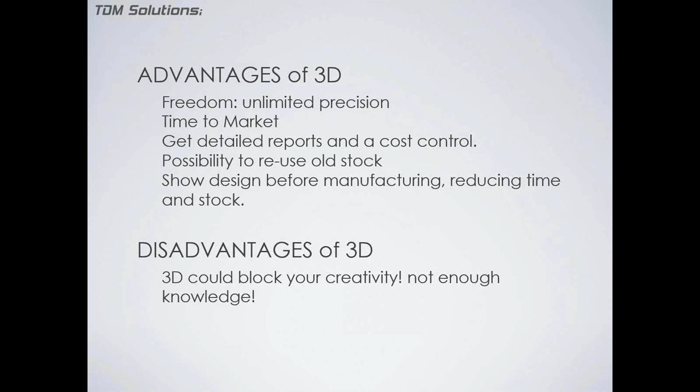For that reason, from the first day, we have a lot of training material on the website. We have videos, we have step-by-step tutorials, we have a lot of resources to help you learn the software. Well, a lot of things make RhinoGold different. Let me jump these slides, because we have a lot of things to talk about today.

Two interfaces in one solution. RhinoGold is a standalone product based on Rhino. When you install RhinoGold, it automatically installs Rhino inside and uses Rhino for all the modeling tools. And you can use RhinoGold in your interface inside Rhino or in the RhinoGold interface.

Today I will show you all the functionalities in the RhinoGold interface, but it's exactly the same in the Rhino interface. If you are a Rhino user and you love your Rhino interface, use it. It's exactly the same.

RhinoGold worldwide events. I think this is important to show you that we are worldwide. It's software developed here in Barcelona, but we are in the most important trade shows in the world: from JCK Las Vegas, New York, but also Brazil, Japan, Italy, Basel in Switzerland. I think this is important to know, that the health of the product is really good.

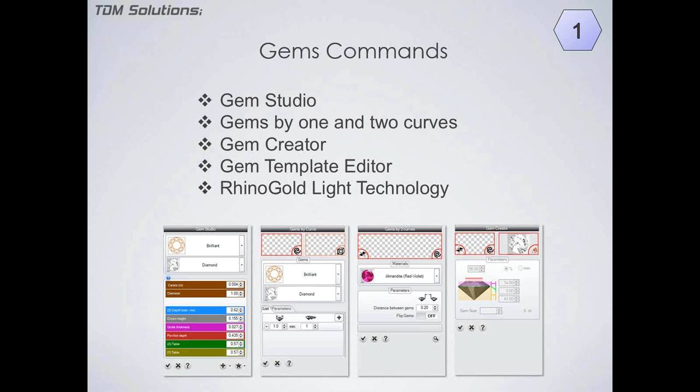The first commands are the gem commands. We have a lot of gem commands to place gems. Probably the most used is Gem Studio. Gem Studio allows us to add stones. We have other commands to do that, for example, if we want to place gems by one curve or by two curves. We have a lot of ways to place a stone. Let me show you.

Probably we have a small delay. Okay, for that reason I'm waiting some seconds.

Here we have the interface of RhinoGold. I repeat, it's exactly the same if you are running on Rhino. Here we have the gem tab, with all the gem tools. To add a gem is extremely easy, just we come to Gem Studio. Here on the right side we have all the commands of RhinoGold.

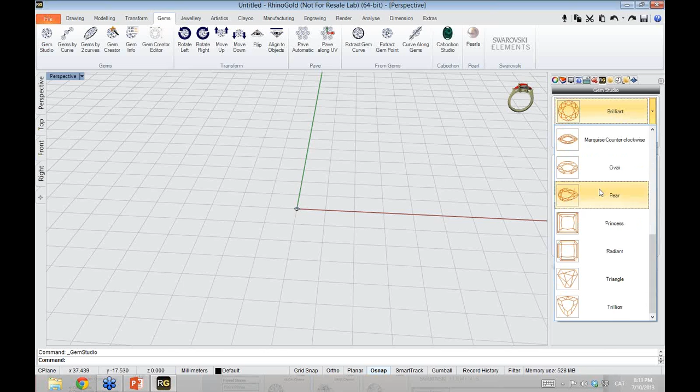In this case we are running Gem Studio, and here we have the option to select what kind of stone we want, the material, and all the sizes. In this case we are working with a brilliant, so we just have diameter. If we select other stones, we have other options. It's really easy, just type by diameter or by carats: 1 carat stone, 1 millimeter stone.

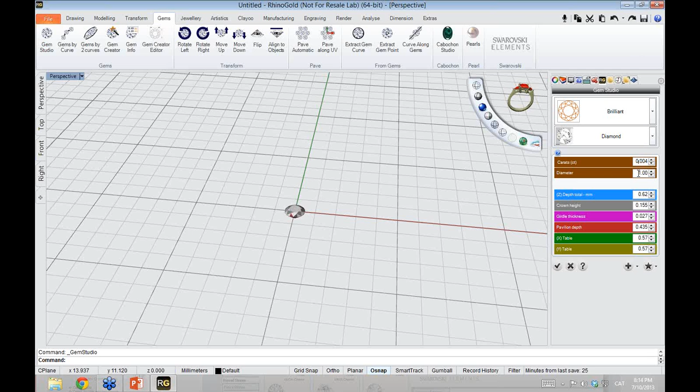Here we have the stone. It's extremely easy. One interesting thing is here we have a tree with all our jewelry objects. If I want to edit this object, I select it and press the middle button, and then this window appears, and we can click to edit the stone again. This is really nice.

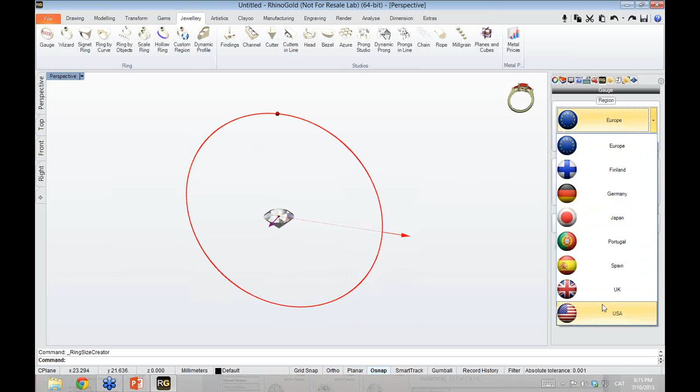Other important thing is if we create - let me hide the grid to work faster. In the Jewelry tab, I will create a circle with a finger size. Here we have the regions - US, we will select 5.5.

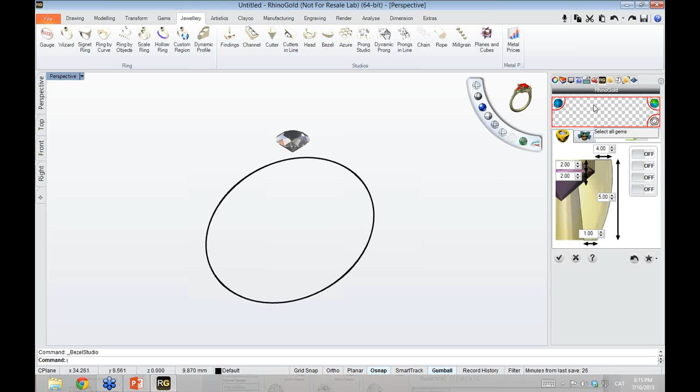Now with gumball we will move up, and now I will create a bezel. To do that is exactly the same workflow for most of the tools. We select the bezel command, and the first thing we have here is we must select a stone - here select gems and cabochons.

Automatically a preview appears. The idea is, in the RhinoGold commands, we can move the gumballs and modify our objects, or we can type exactly the values. For example, in this position I want to increase it. I can combine creativity and precision in the same command, and I think it's extremely easy to do. Let me add more points because this is a straight, and then I can move it a little bit.

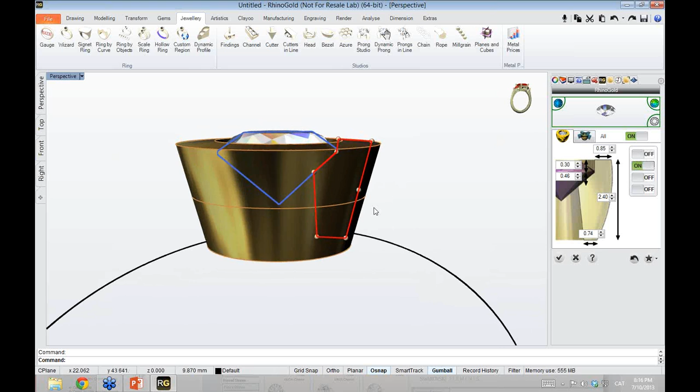And we have something better. The idea is, obviously, in our tree we have all the jewelry objects. If I don't want to see this tree, don't use it - just come to the gem, for example, and now middle button and edit.

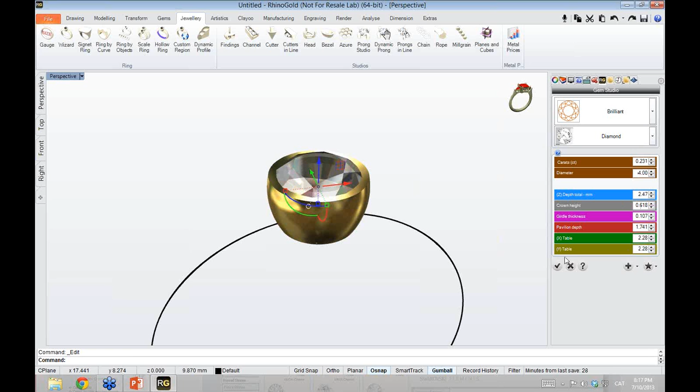I think it's not so complex.

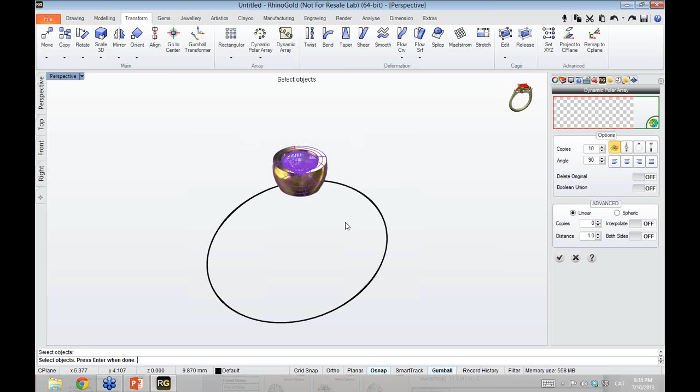Now in Transform, we have a command for dynamic polar array that we can select this object with. This is very similar to the polar array we have in Rhino, but here we have gumballs and it's a little bit more intuitive, because sometimes in jewelry we don't know exactly if we want 7 or 8 copies, and here we can decide at design time.

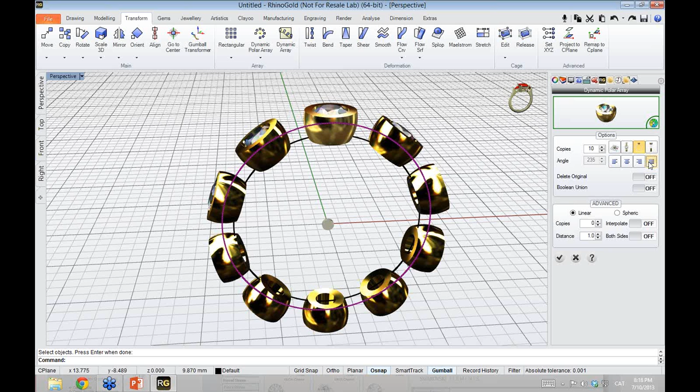Now I will add more copies, and also we have the option to add more copies in one direction. Let me show you - now we are adding more copies. And also we can interpolate, both sides. I think it's easy. And then we click OK, and we have our design.

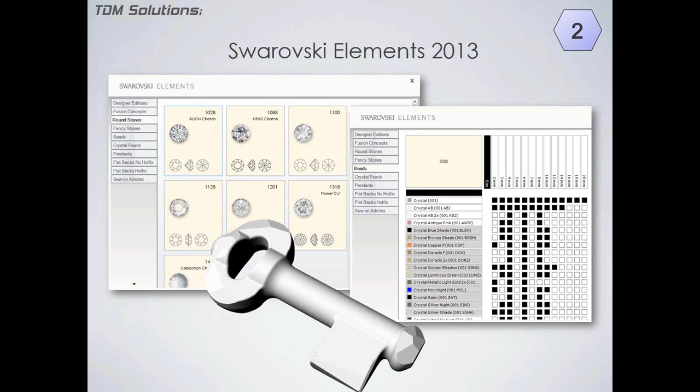The second top 10 feature is the newest Swarovski Elements catalog. We have all the Swarovski elements in 3D inside RhinoGold. This is really nice because you have all the objects, and RhinoGold recognizes these objects, to create reports and to create all that you want, with the full library here. I think this is really nice - you can find very beautiful stones.

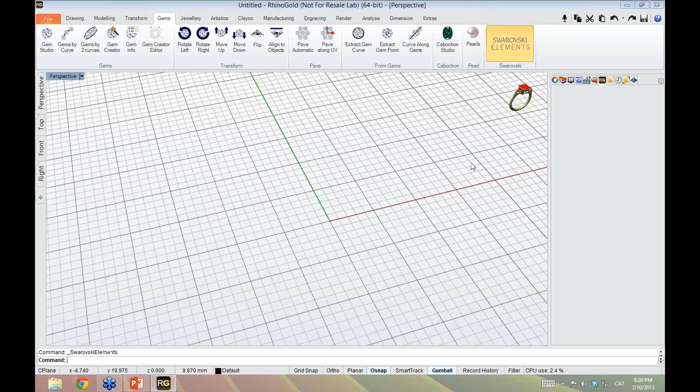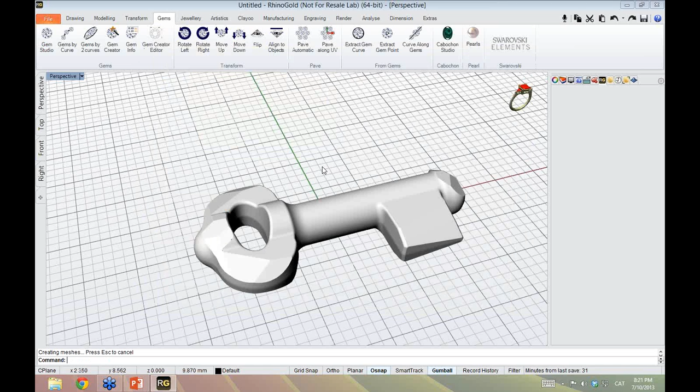Let me show you the Swarovski Elements - here we have this dialog, with all the families. Believe me, it's an extremely complete catalog - it's a lot of months of work to have this quality inside of RhinoGold. The idea is, all that you want, you have it here. If you want to add, for example, the key, just click on it, and here you have the sizes available in this model and also the materials. If you want to add the 30 millimeter crystal, just click here, and voila, here you have your Swarovski stone.

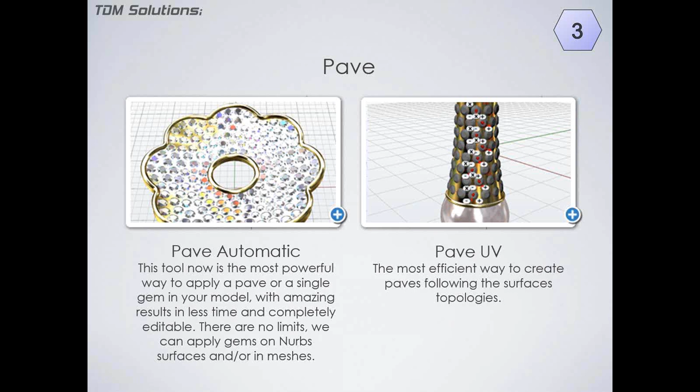Well, pavés. This is an amazing new tool in RhinoGold 4. I think it was a lot of work, months of work to create this command, and now you will see why I'm telling you that. The idea is to combine the automatic pavé with your experience creating pavés, because obviously the computer cannot create a beautiful pavé. It can create a mathematical pavé, but not a beautiful pavé. I think with this tool now you can interact with the software and say, okay, I want these stones here. Let me show you.

File open, and here we have pavé. Here we have this model. For sure this is an extremely simple model, the objective is that you understand how it works. On the website you can find a lot of videos using pavés, but here I want you to understand the concept and know how to work with this command. The idea is the pavé can work with any object that you have. It can be a surface, a solid, a mesh, or all of them. You can select different objects, different surfaces.

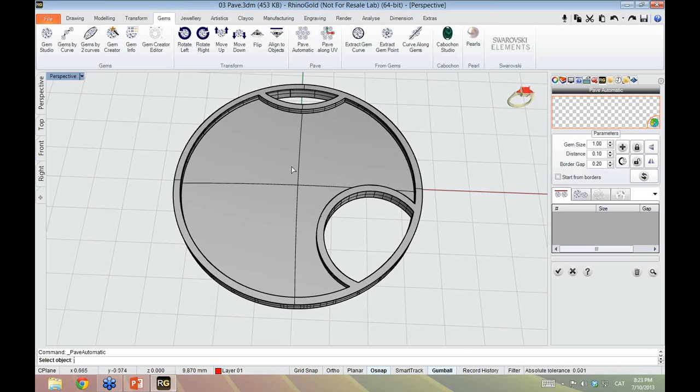Then obviously the pavé is inside of the gem tab. The idea is we come to gems and we have automatic pavé, exactly the same workflow as in Bezel and other RhinoGold commands. You click here and select where you want. In this case, just I want to use this. Great, here we have all the options.

By default, the pavé works with just one size. If you want to create a pavé with just one size, it's by default - just type here the gem size, the distance between the gems, and the border gap. But also you can define if you want a range. I want to use stones from 2 millimeters to 1.1, and then the pavé will try to fill first with the 2 millimeters, later 1.9, 1.8, and so on. But also we can select a gem list - imagine you want to create a pavé with just 2 millimeters, 1.6, and 1.4, then you can define that. In this case, just to show you the workflow, I will use one gem size.

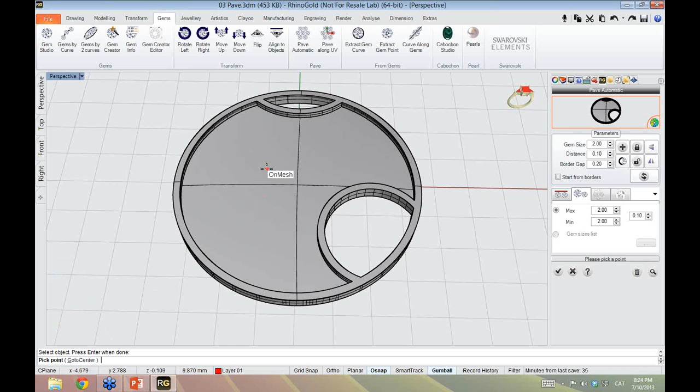The idea is here we have the preview. We click here, and in the command prompt we say, okay, pick a point or go to center. We can pick a point, the origin point for the pavé, or we can click go to center. As you can see, it's adding more stones and it's moving - this is to try to find the best position for all the stones. Then the idea is now we have all these stones, and it's done in an automatic way.

The idea is we can add more stones. For example, we want to add more stones, and now you will see here we have in red, because we have a collision. Then anytime I can click on refresh and try to adapt. Great.

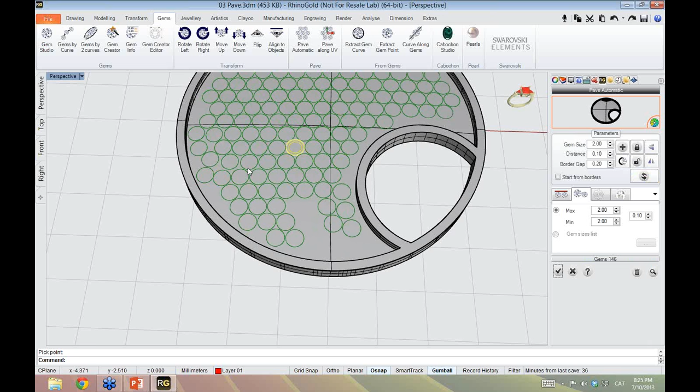Other options that we have: we can select different stones, and with the keys plus and minus, we can modify the diameter. In this case we will make it bigger, and obviously we can move it - any stone we can move it. And I repeat, anytime I can click here and it's recalculating.

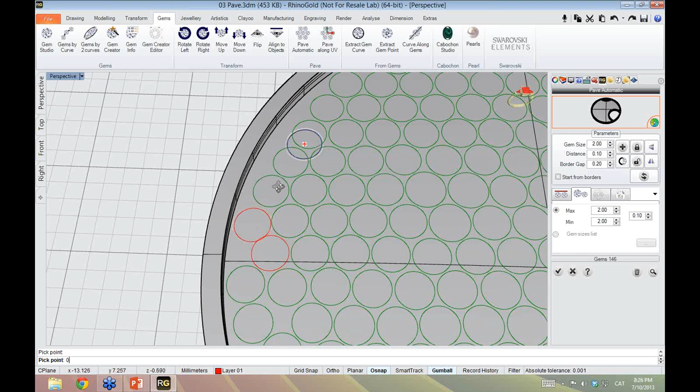Then now I want to add more stones, so I add one more here. Probably here we don't have space, but anyway, I wanted the pavé to try to place it. Then I can move it here.

Other important thing is I can say, okay, I don't want you to move these stones. For example, I place these stones here, and I don't want to move them, so I can click to lock objects. Then the pavé will move all the rest of the stones, but never will move these stones. If you like one area, you can lock it, and that's it.

For example, now here is bigger, we can resize - here too - and recalculate. We can select by window if we want, and also we can delete it. If we don't like one stone, we can click here, press the delete key, and delete it. I don't want this one.

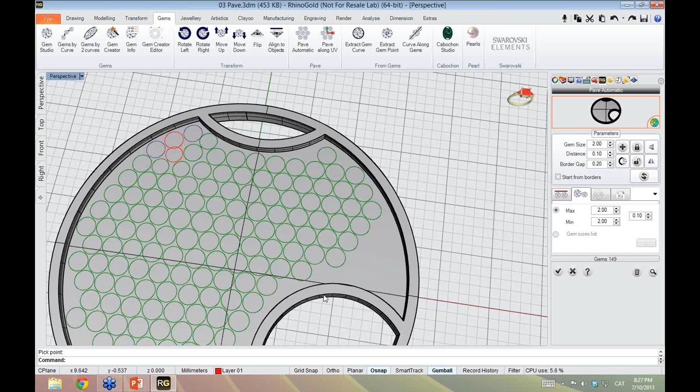I think it's easy. Other important thing is the refresh button and the preview. The difference is the refresh doesn't add any stone, while the preview always tries to add more stones. So if we click here, it will try to add more stones.

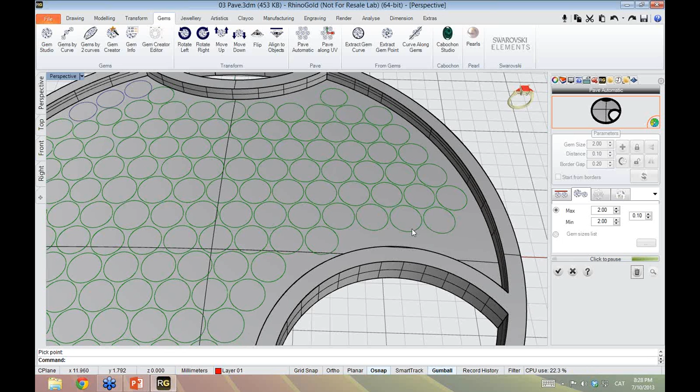Okay, then probably the last thing in pavés is we can add automatically the prongs. This is completely automatic, and of course we can move it. As you can see in blue, it means it's selected.

Also, you can select some of them and increase the size exactly as we use it in the stones, and we can add more and more. I think it's really easy to use. But the best thing probably is you can drag and you can delete and add more stones and so on.

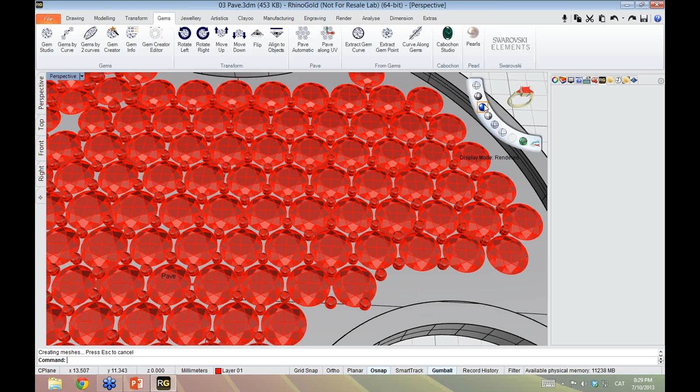Then when you finish the pavé, you click here and you have your pavé done. Obviously the pavé is on the tree. It means later I want to edit this pavé, we can edit parametrically and add more stones or modify some parts. I can do what I want, because it's parametrical.

Next one, here we have another command, Pavé along UV, which allows creating pavés following the UV topology of the surface, but we have no time. We must talk about a lot of things.

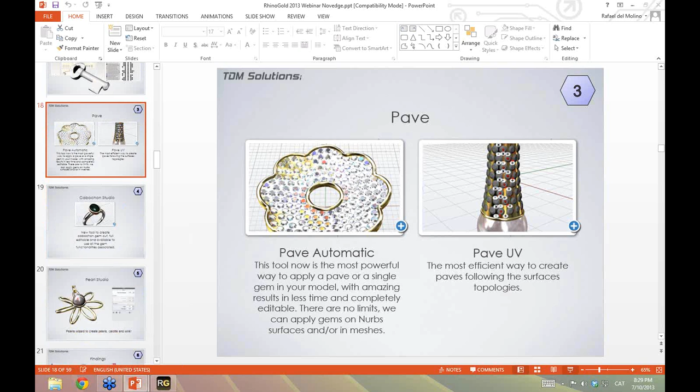We have Cabochon Studio. It's a tool to create cabochons, extremely easy to use. Let me show you. Have here cabochon, and the idea is the same. We click on Cabochon Studio, and here we have a preview.

We have the different types of cabochons, and here we can modify the sizes. We can increase. Great, here our cabochon, and also in our tree.

Next one, the pearls. A lot of RhinoGold 3.0 users ask about pearls. Here we have the command Pearl Studio, which allows creating the pearl, the calotte, the wire, all that we need. Also we add the finding. We will see in our Clayoo exercise that we will add some findings, but here we have a really nice, good quality library of findings, and later you will see how easy it is to add it.

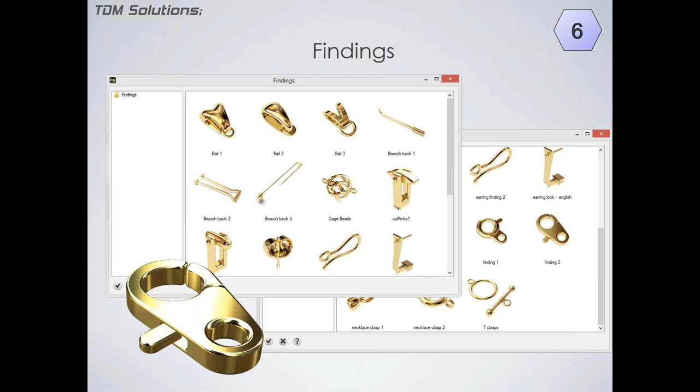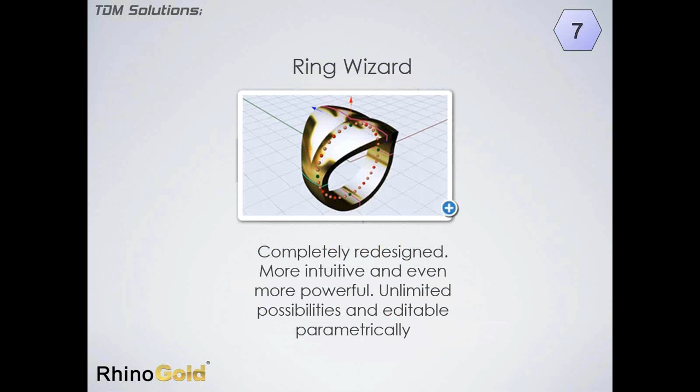Next one, Ring Wizard. Probably this is one of the easiest tools to use in RhinoGold, to create very simple rings. Let me show you.

Here in the Jewelry tab we have all the metals commands, the ring, the signet ring, the head, the bezel. Then to create a ring, one way is to click on Ring Wizard. Let me change to render it. The idea is, by default, we are working with this profile. We can modify all these values using the gimbal or typing here all these values.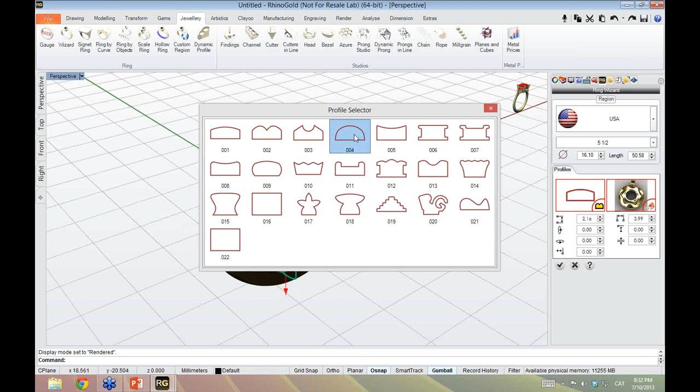Also, we can click on profile and change the profile. Now I will click on the top and I can move it, and now it's affecting just this area. If you click outside, it automatically disables the selection. If you click here and later you click here, you have both, then any modification that you do now is affecting both.

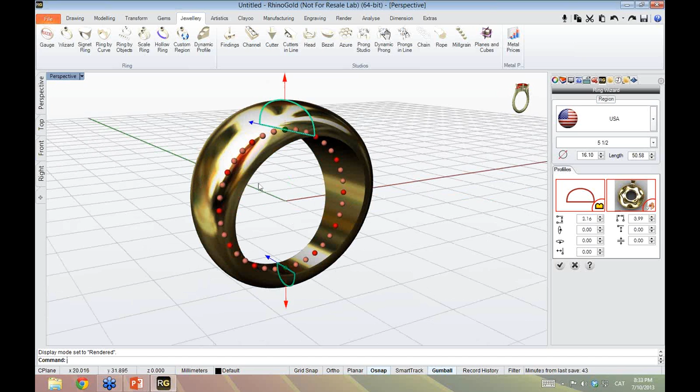Now I want to change the profile and use this profile. Now it's affecting both. If you click again, it automatically disables. Other options we have here: we can hollow the ring. As you can see the section, we have 0.6, and obviously we can add all the profiles that we want.

And our ring, anytime we select the ring, we can edit this ring. I think this is really interesting.

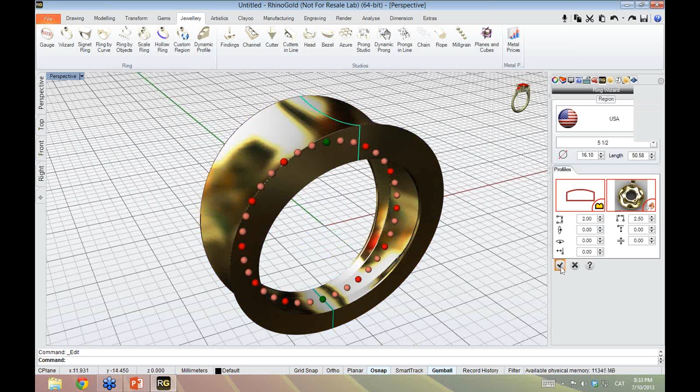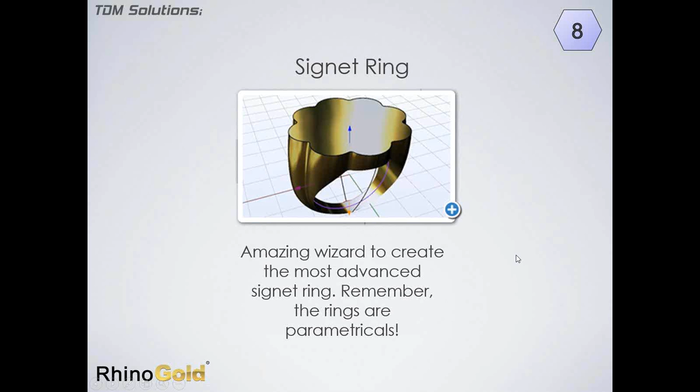Next one, signet ring. This is a tool to create signet rings. Let me show you. The concept is really similar. The idea is we click on signet ring on the top, and RhinoGold shows us just a preview.

And the idea is we can modify the shape. Here we have a library of shapes. Of course, you can add your own shapes just by clicking here. Then, if you want to use one RhinoGold default profile, you can, but I recommend you add your own.

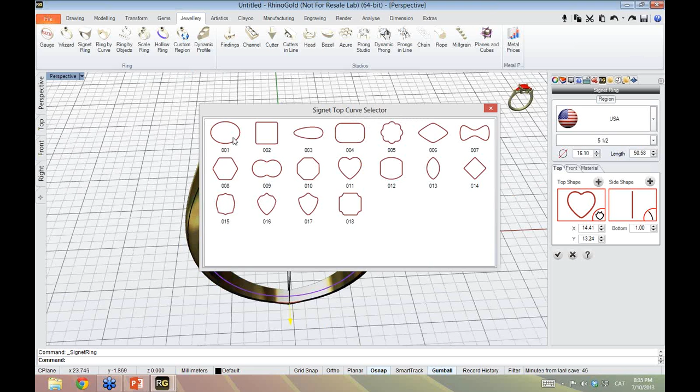Great, then also we can modify this section. By default it's straight, but we can change the side shape and define this one. As you can see now, the profile is completely different, and then we can modify.

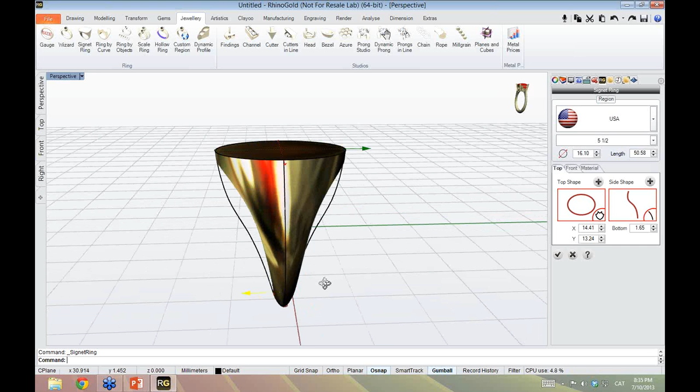If we change to 'Front', we can modify all these options, if you want to add more. As you can see in the gumball, you see the distance, but anytime you can type it.

Here, our signet rings. Forget trying to do it with network surface and all these things. Later, I want to change the size, F2 key, and now I will change the size, keeping exactly the same shapes. Easy, right?

A scale ring. This is a really nice tool. The idea is, imagine in this case we want to scale this ring, but we want to keep all the stones area. I want to scale all the ring, but I want to keep this area because I want to use the same gem sizes and so on. Then I can define that I want to do a scale keeping this area. It's really easy. And also I can export automatically by layers. For example, I want you to create one layer per each size, or you can export to STL. Okay.

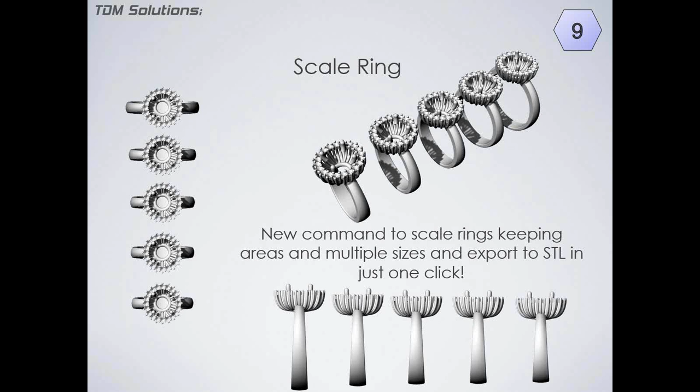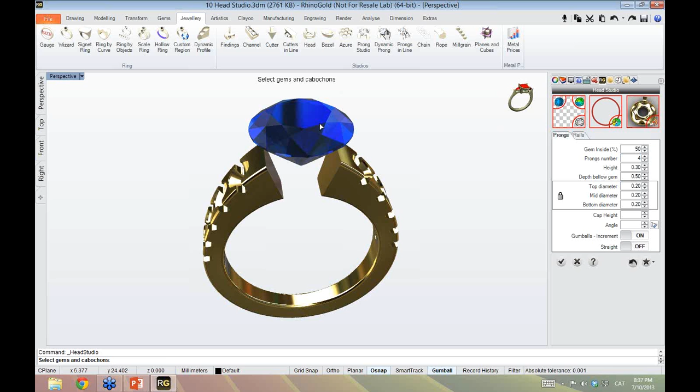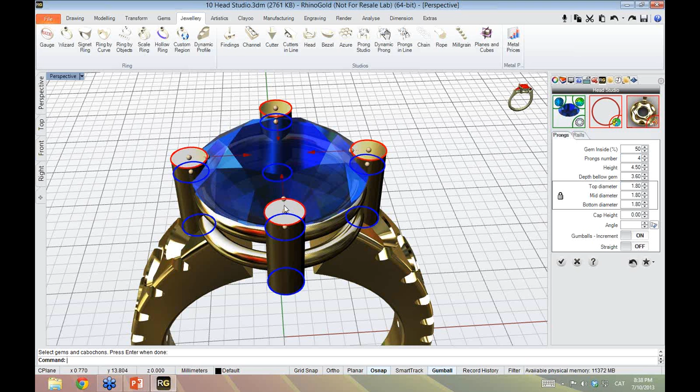Let me show you some tricks. If I click on a profile, it's just affecting this profile and this prong. If I want to modify all of them, if I press the shift key and then I click, it automatically selects all of them. So when you want to modify all of them, use shift. For example, I want to move this prong, but with shift, I'm moving all of them. Okay.

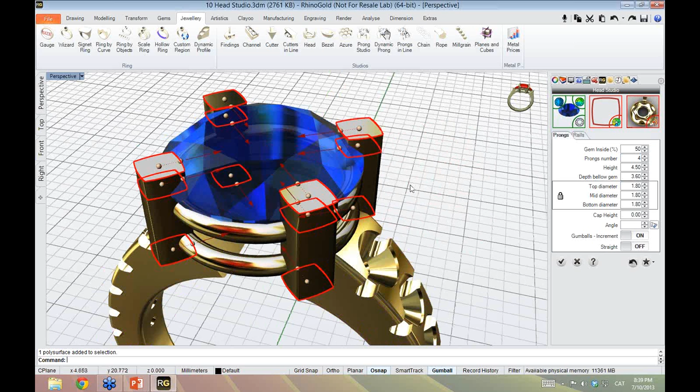Then, for example, I want to modify the profile. I can modify just the top, but in this case, I want to modify all of them. Then I come here and I select a profile. For example, I want to use this profile. Easy, right? Now I want to unselect all, so I double click outside. And now I will select the bottom part and I will move it. Not so complex, I think.

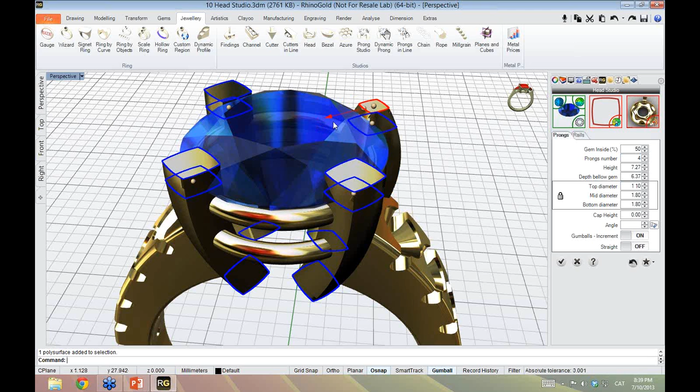Obviously, you can modify all that you want, the sizes and so on. You have the undo. And also you can modify the rails. Imagine that I want to select this rail, and I want to move it down. I want to select this rail, and I want to move it down, and I want to scale it. Okay.

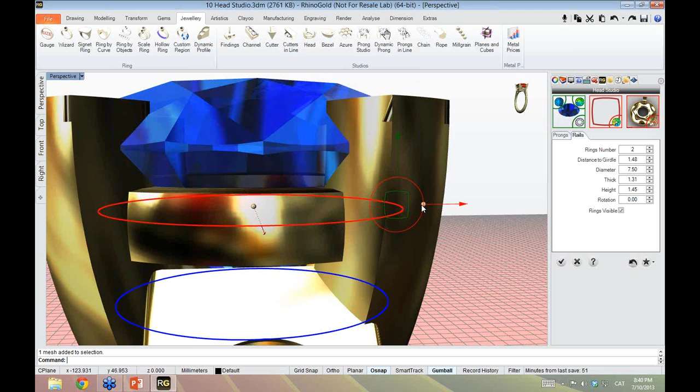Obviously, if I select both and I come here, I can select any shape. Let me move and scale a little bit in this direction and move it a little bit. And also, if we want, we can rotate it. We have the option to rotate this profile as we want. Now the same on the bottom. We will come to this sphere, and in this sphere we can scale, rotate, and move it down.

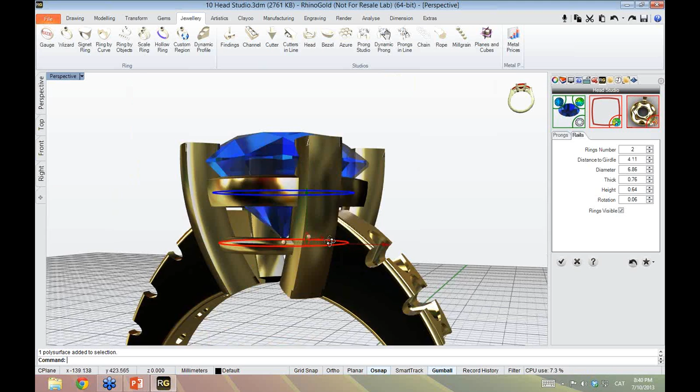Then I click to accept, and now we have this head. And this head knows that it depends on the stone. If we modify the stone, it automatically adapts the head. Really easy. And of course, select the head, F2, and then you can edit again and do what you want, add more and so on.

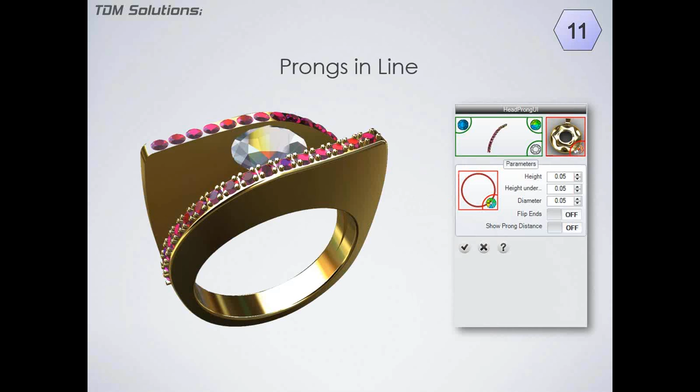Next one. Well, we are in the top 10 features, but we have 10 minutes. Let me present you again the top 10 features part 2. It will be really quick. We have tools to create prongs. One of the objectives of RhinoGold is to try to save you time. Let me show you this tool, because it's probably one of the most representative tools about saving time.

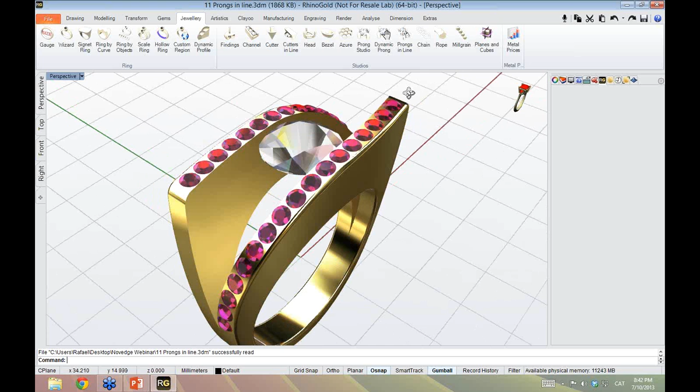Here, prongs in line. I want to add prongs here. We have different options. We have the Prong Studio, but in this case where we have a line of stones, we have prongs in line. Then the same concept. First, select the stones. And here is the result, we have a prong, and take a look at that. Probably in shaded it's better.

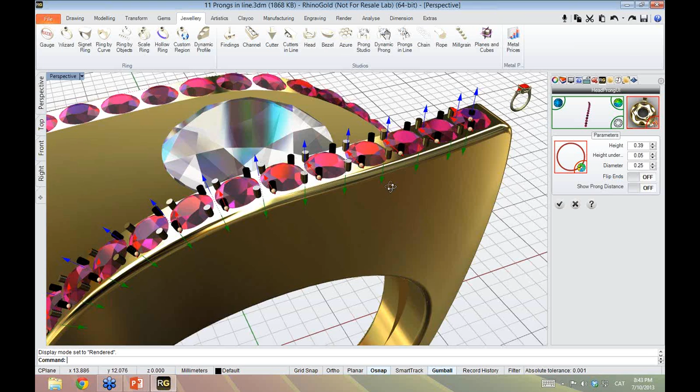If we move outside, it automatically adds a new prong. Easy, right? But if you move it on the stone, it automatically adds 4 prongs. Then if you want to affect all of them, if you press shift, it affects all the prongs that we have. We can modify one height, but with shift it can affect all of them. We can modify diameters. Let me define 0.6. And also in this part, we can align.

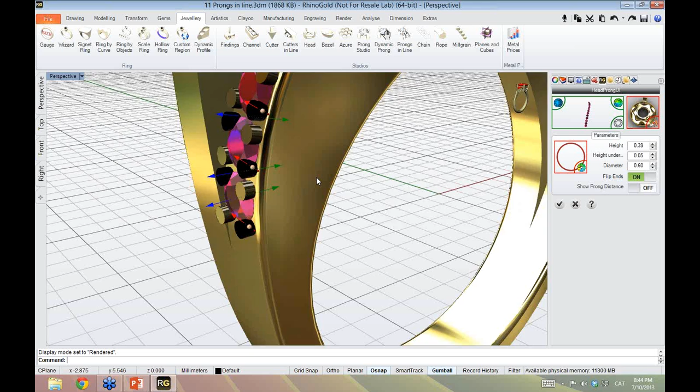Okay. Then here we have our prongs. Let me explain one thing: now the prongs are a cylinder, just a cylinder. And we don't want to add more options in this command, because if not, we have 25 options in each command, and I don't like that.

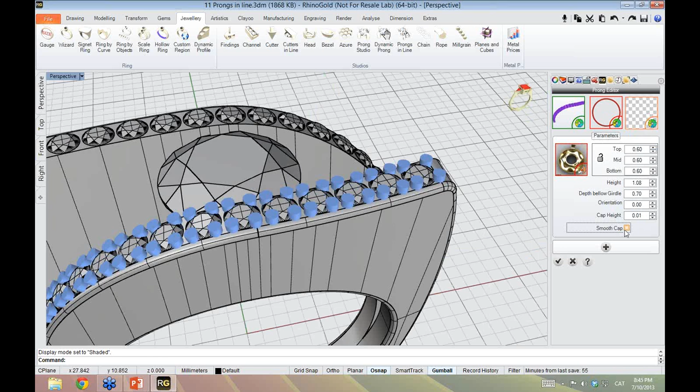Oops. Sorry for that. This is my computer, my working computer, and I'm not working with the official RhinoGold version. Okay.

We have the report tool. This is a really interesting tool to analyze all the cost and so on. Obviously, we have tools in RhinoGold if you want to analyze the weight of one object. You can. But probably the most interesting thing is you do one click and it automatically analyzes all your model. Let me show you.

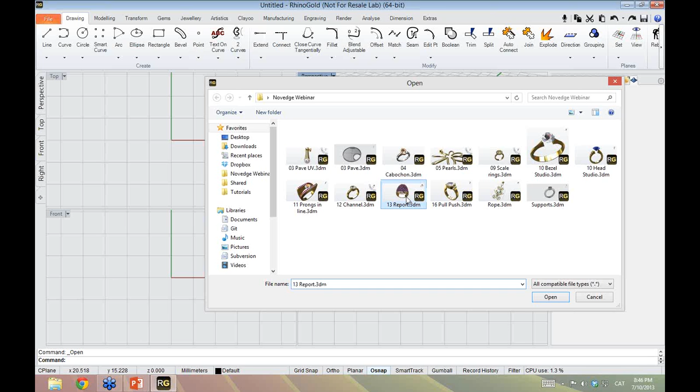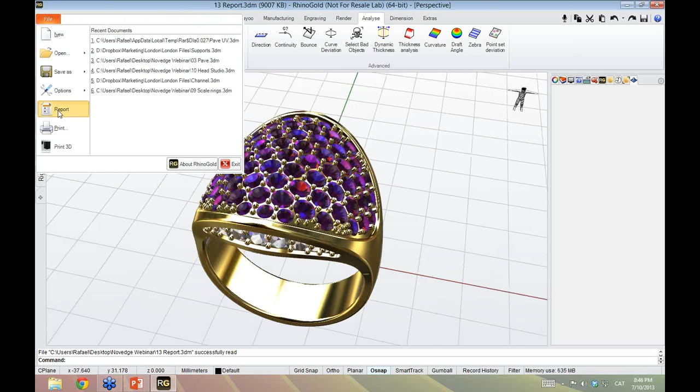Here we have our design, and here in Analyze, I can analyze the weight of the metals and so on. But probably the most efficient way to do that is to come to File, and here we have Report. Now RhinoGold is analyzing your design and counting everything. And here we have an overview.

When you save your file the first time, it automatically starts recording. Then you can know how much time you invest to model one design. Here we have different tabs with all the quantities, all the metals, with a small preview. We have the calendar, and here in tasks we can define.

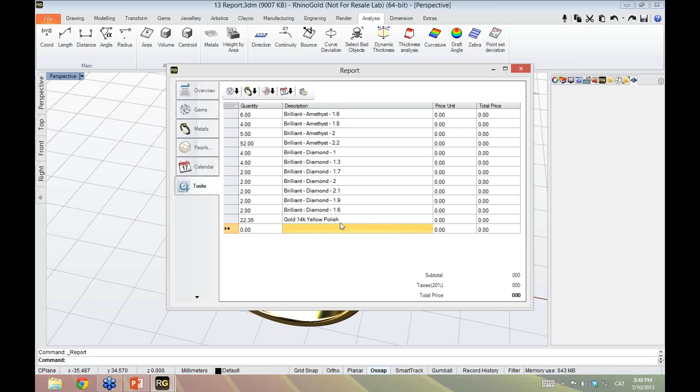We can add all the stones with the metal, define other tasks, and type here, and here you have an easy tool to create a pro forma invoice, or just a report. Good.

RhinoGold has real-time rendering materials, and this is really important because the materials are render materials but also have physical properties. When you change the stone material or a metal material, RhinoGold automatically knows the material is different, and obviously the weight is different. For that reason, when you have different kinds of metals, you don't need to check one by one. Just apply the materials, and the report will calculate for you.

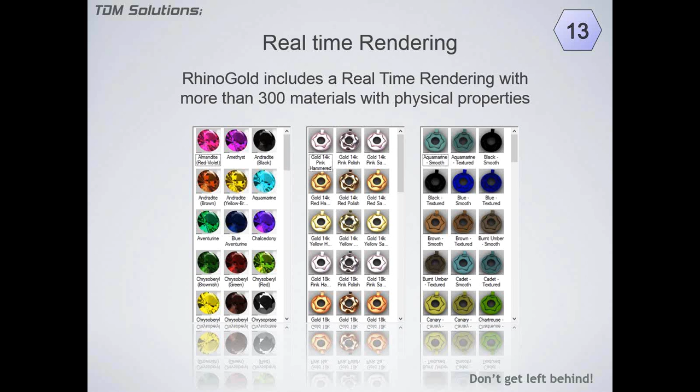Well, raster to vector is a tool with which we can convert any image or sketch to curves. Also, we have Texture 3D. This is an amazing tool to create 3D textures on your jewels. And the best thing, this is a surface. Then you can prototype, you can trim, you can do all that you want.

Another interesting command is Pull Push. It's a command where we can select a curve and an object and automatically push and pull inside of the solid.

Also for manufacturing, we have a lot of tools for 3D printing. We have nesting to calculate the position of all the objects, and also tools to generate all the supports. Some printers need supports to print, and here we have tools to create that extremely easily. We have nesting to place all your models in your machine, and STL Wizard to automatically repair your STL files.

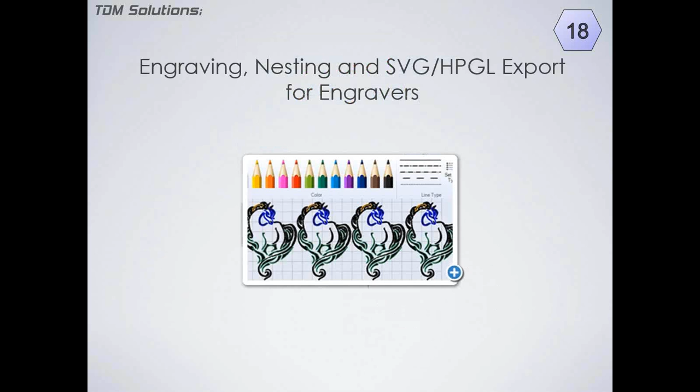By default, you have about 20 printers from SolidScape, DWS, EnvisionTEC, and so on, but you can add your own printer there. Also for lasers and cutters, we have tools for engraving, for nesting, and also for exporting in engraving formats.

Well, we have very few minutes. Clayoo, what's Clayoo? Clayoo is a tool to model in a freeform way. The idea is when we want to create organic shapes, Clayoo offers us a lot of advantages to model. Let me show you a sample, a couple of minutes, to understand how it works.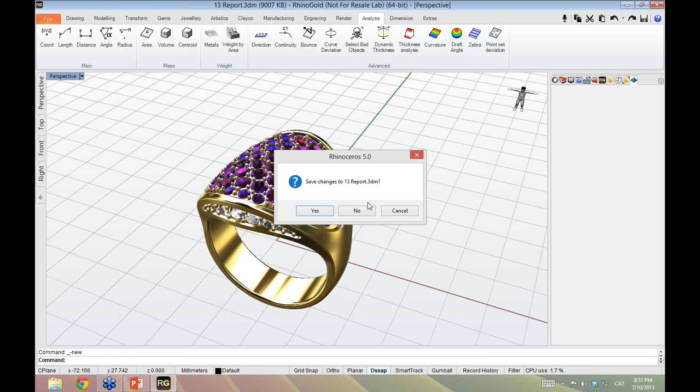Imagine that I want to model this plane. This is a pendant, and I want to use this picture to create this object. Obviously, I can do that by creating curves, loft, and so on, but I want to show you another way. The idea is, here in Artistics, I use the command Place Image 1:1 to place our design. Okay, we'll make it a little bit bigger.

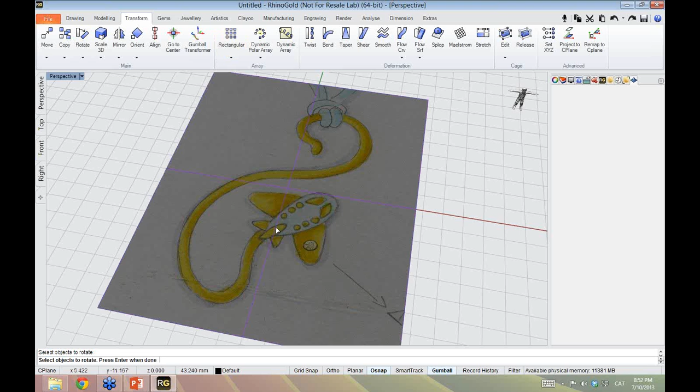Okay, probably a little bit more. Okay, I want to model this part. First of all, I will rotate it because it will be more comfortable to work. Then I will select and I will rotate it. And then I select, and here I have to lock.

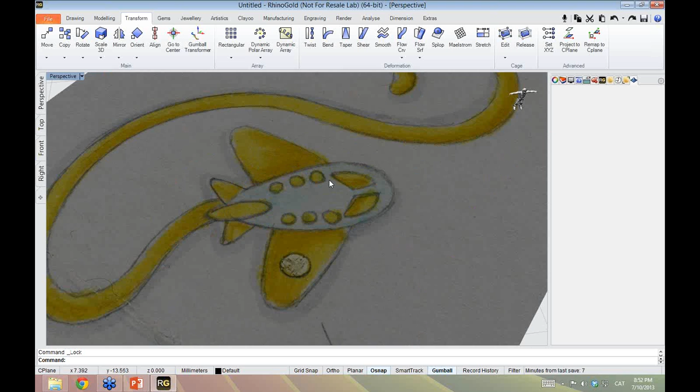Okay, in RhinoGold you have all the viewports, all the display modes here, but if you press Shift, you have hide and show options and also lock. Okay, and now I will lock it to work more comfortably. Then here we have the tab of Clayoo.

Then I will start, just to explain the concept, modeling from an ellipsoid. And the idea is I can select the objects by faces, by edges, or by points. Then the concept basically is I can select some faces and I can scale it, I can rotate it, and I can move it.

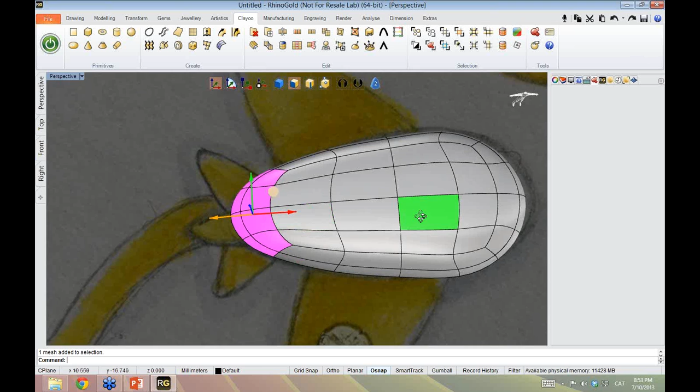Okay, for example, right now I will select, and I will scale that. I change to move, and I move it a little bit. Then the idea is we are selecting different faces, and then we can move it.

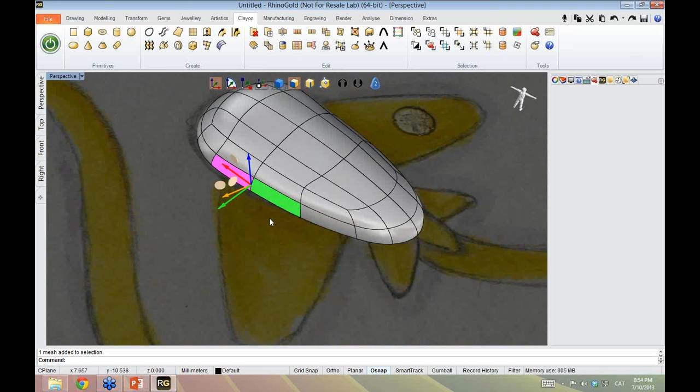Now I want to create the wings, and I will select these two faces. And I will use a command called extrude. The idea is we can select this face and this face, click to extrude, and then extrude these faces in this direction.

I don't know what's happening with my computer today. Let me show you.

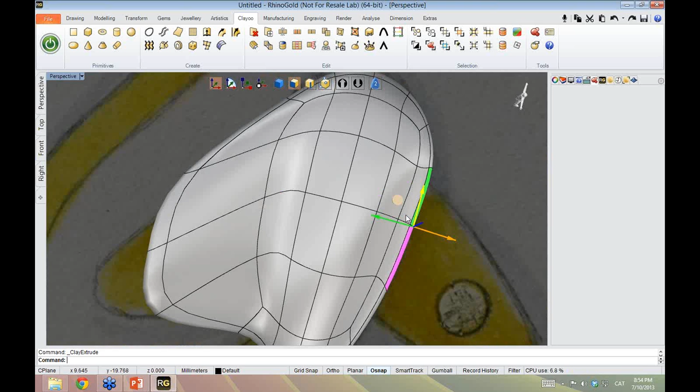Okay, and the idea is I can move all the faces and add more faces and so on. Then I select this one, I extrude it, and I can move, select some points, and adapt to any shape.

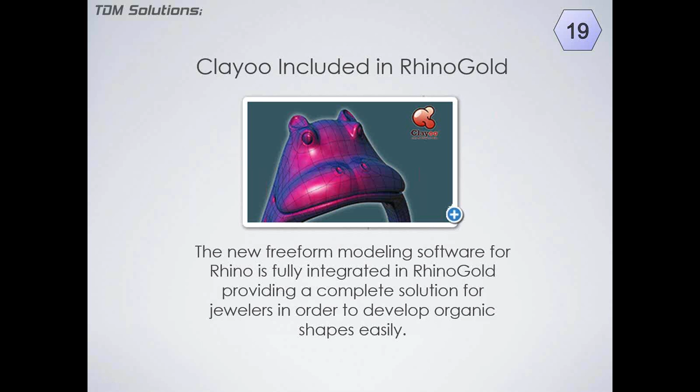For sure we have a lot of tools that would need a couple of webinars just to explain, but this shows the concept that we can pull and push and create organic shapes with Clayoo. RhinoGold includes Clayoo. All RhinoGold licenses include Clayoo. If you have RhinoGold 4, by default you have Clayoo.

Then, RhinoEmboss is still in development, but it's working really fine. RhinoEmboss is to create reliefs. The concept is we are creating curves and we can create reliefs, and it works really nice. I hope in a couple of weeks we can release the first public beta, because right now we are working on the tutorials and all this stuff.

But it also will be included in RhinoGold. If you have RhinoGold today, after we release RhinoEmboss, you will have your own license too. And exactly the same with the Swarovski Elements and so on.

Well, of course, in 40 minutes I cannot explain more things, but we skipped a lot of commands: smart curves, text on curve, scale by wave, chain studio, texture creator. There are a lot. You can find videos and so on on our website too.

Last few minutes, RhinoGold Render Studio. The idea is RhinoGold Render Studio allows us to create renders in minutes. You just select the environment, the ground plane and the materials, click render, and that's it.

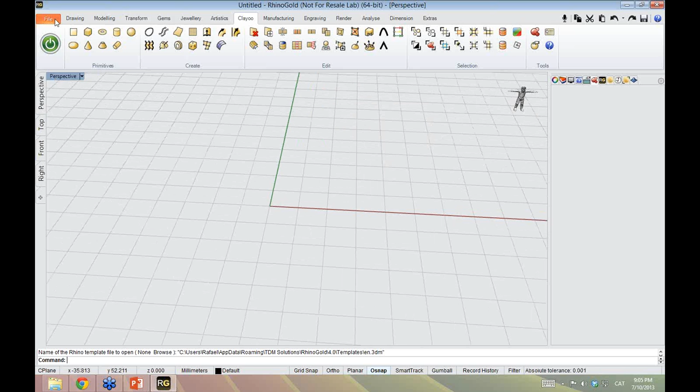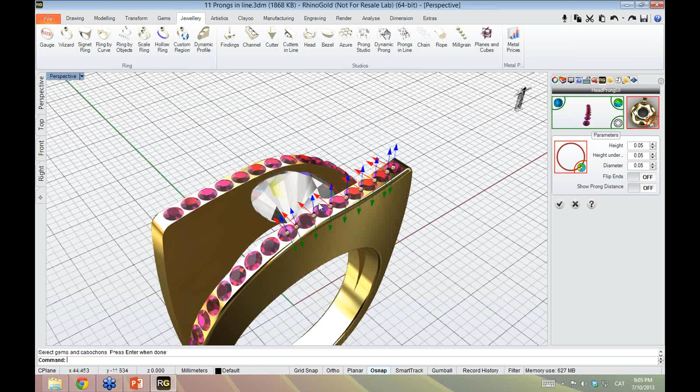Can you please go over creating prongs and editing them to have round tops? Yeah. Let me open this model, probably the easiest way. Eleven prongs in line. I select this one. Then you select these prongs, you press F2. I will change to shaded. You select all of them, and here the smooth cap, and you define the height. Then you can do it for sure, any kind of shape.

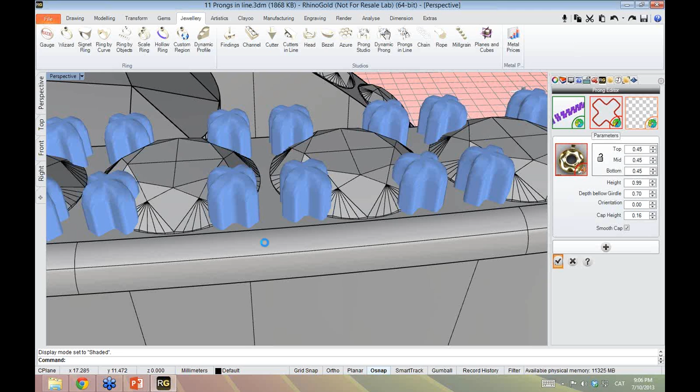This is a really nice question: I suppose I can continue using the V-Ray license I already have? Yes, of course. You don't need to buy another V-Ray license. You can use your V-Ray license to use RhinoGold Render Studio for V-Ray. And for Brazil it's the same: if you have Brazil, you can use it with your Brazil license.

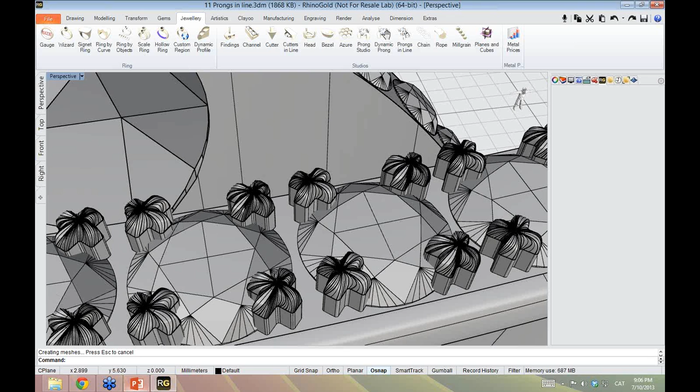Well, I don't see any more questions. I see that Pedro is writing other questions, but let me just show you how to learn RhinoGold. Okay. Of course, we have on-site training. We were doing on-site training worldwide.

But we have one interesting website. It's learn.rhinogold.com. There you can find tutorials. And you can find a lot of free tutorials, about probably 40 or 50 tutorials, for free. And also you can subscribe, and I think it's 99 euros per year, and you have access to all of them. And I think it's really interesting.

Another interesting website that we talked about when we started the webinar is myrhinogold.com. Here you can find a lot of jewelers worldwide, and we have a forum, we have videos. All the news and so on are here. And also you can find some interesting jewelry designers, and you can chat with them, and you can send private messages and so on. I think it's a good website to create community.

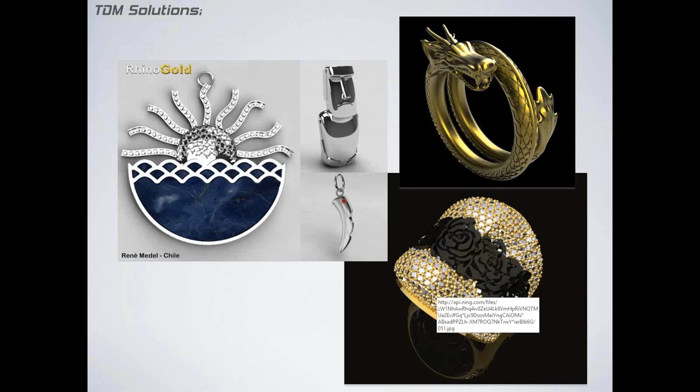Then here we have some designs of these users, schools, from Japan to Argentina to Ukraine. Cool. Awesome. Oh, you got René there, René Medel. Okay. Then Rafael? Okay. Oh, hey, Renee's here.

Renee's here. Do we have any other questions, or do we want to do another one, or shall we end the presentation? Pedro, no, I think no, because I don't see any. All the questions that they have in the list are answered. Okay. Yes. Pedro did an awesome job of answering all these questions, along with Guillermo. So I guess we'll just end the presentation. Yeah. So I'll switch back to me as a presenter. Let me know if you guys can see my screen here. Good to go? Yeah. Cool.

All right, so as you guys can see, Rafael, Pedro, and Guillermo have been working nonstop to cover all the minute details and features that are coming out with RhinoGold 4.0. So Clayoo is in there, Rhino Emboss. So, I mean, it's jam-packed with features.